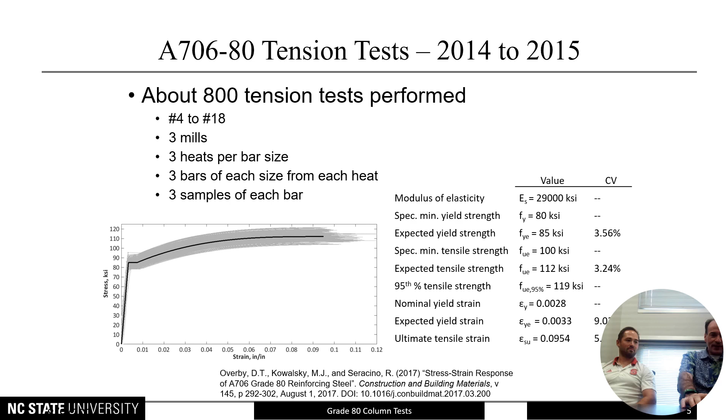And in the conduct of that test, he did approximately 800 tension tests to get the stress strain curve of A706 grade 80 steel. In the US, 706 is a designation for weldable seismic steel. And we came up with recommendations that led to changes in the Caltrans seismic design criteria.

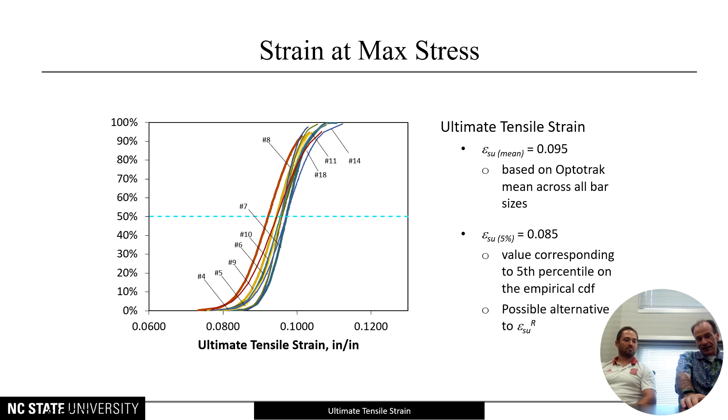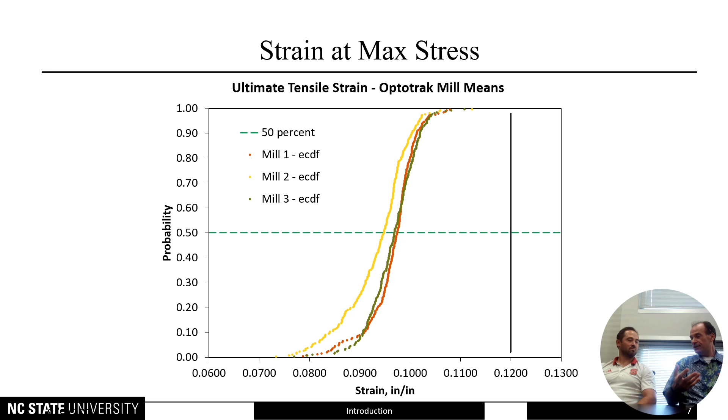So things related to strain at maximum stress, yield stress, ultimate stress, all the typical parameters you would need, and they were expressed statistically. There was variation with bar size for all these different parameters, including the ultimate tensile strain. That one was lower than what you'd expect for grade 60 steel, but we felt it was high enough, sufficient that there was promise to use this in seismic design of bridges.

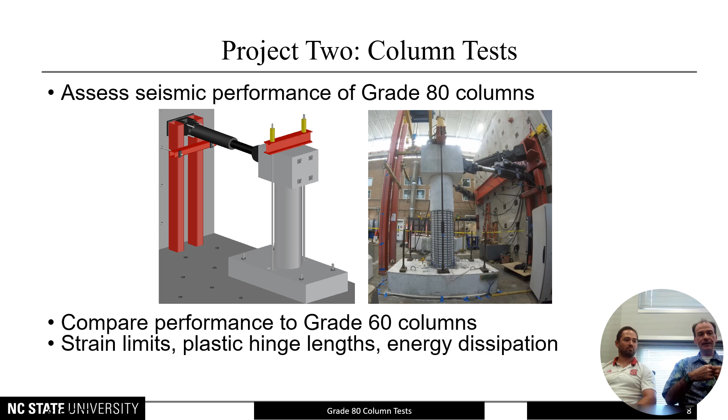That led to our second project a couple years later, where we wrote a research proposal to study the behavior of columns reinforced with high-strength steel. Thinking about the deliverables, we had to look at the performance of the columns, compare them to columns reinforced with grade 60 steel, look at plastic hinge lengths, energy dissipation, and strain limit states. Leo did that, and we wrote a different paper on that topic.

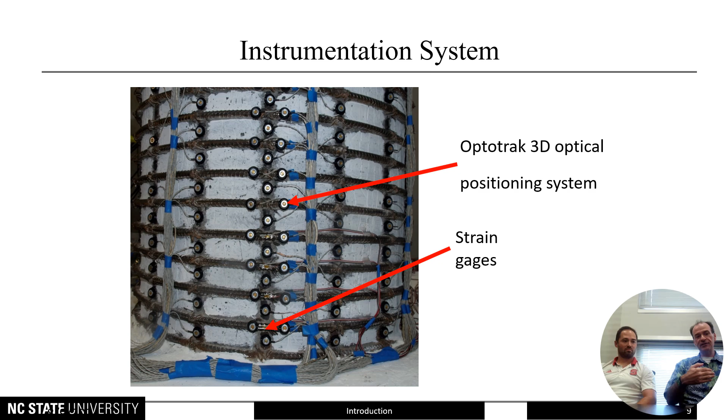We had instrumentation which we call Optotrak. It's a system that uses LEDs to measure position to a very high degree of accuracy up and down the reinforcing steel, and they were there for strain. To that point in time, that's all we were using these for, to measure strains and then curvatures, and we'd been doing that for many years prior.

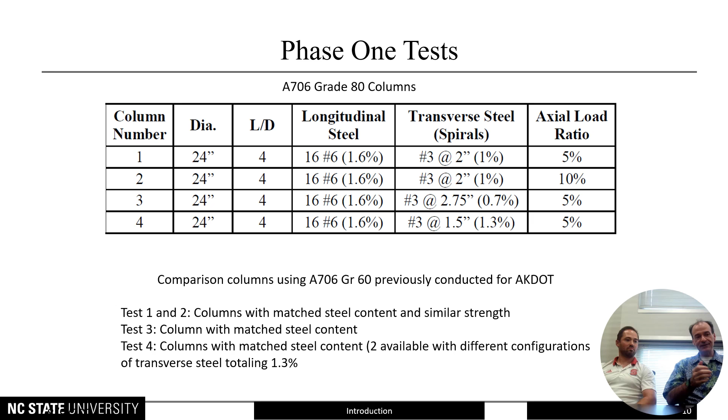We noticed that overall, as you'd maybe expect, there was a slight reduction in displacement capacity, nothing drastic, but it was important to quantify.

But the other thing we noticed, which I think was more important, was that in the columns reinforced with grade 80 steel, there wasn't a lot of delay between buckling and fracture. It was almost like the next cycle, whereas in grade 60 steel we'd always seen multiple cycles in between. We thought that was important and interesting - what's going on?

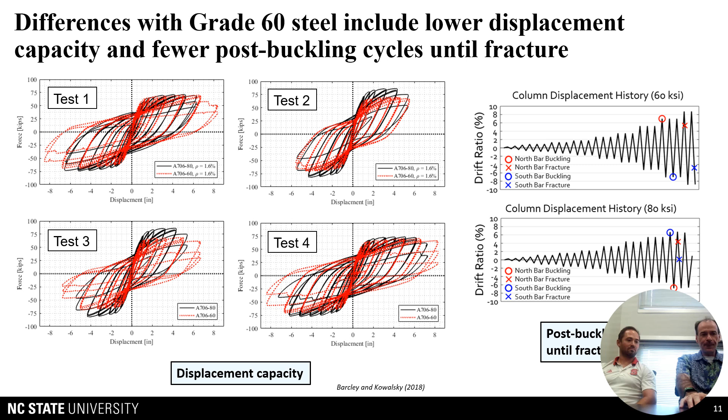Why is that different? And that's what led to this, right? So I don't know, Leo, if you want to chat a little bit about this - not to put him on the spot. Well, I'll say maybe for a future one you've got to call up Chad.

Chad did a bunch of those tests, so it was a direct comparison between grade 60 and grade 80. I think when we were thinking about it, Chad developed a bunch of different equations for determining where the cage or the spirals yield, and then what yields to bar buckling, in terms of trying to get different limit states.

Bar buckling was always something you design to, and then you have a little bit of factor of safety after that. But after seeing this, with bar buckling you don't really have a whole lot of factor of safety after bar buckling with the grade 80 column. So what's the difference? Why is there this difference?

So we said, well, when it buckles - this was a long time ago, I'd have to go back in the Wayback Machine - but basically taking the curvature and using that curvature along the cross-section to calculate the strain, particularly the strain that the buckled bar would undergo in compression. That's the compression strain on a buckled bar, which we were able to measure because of the Optotrak system.

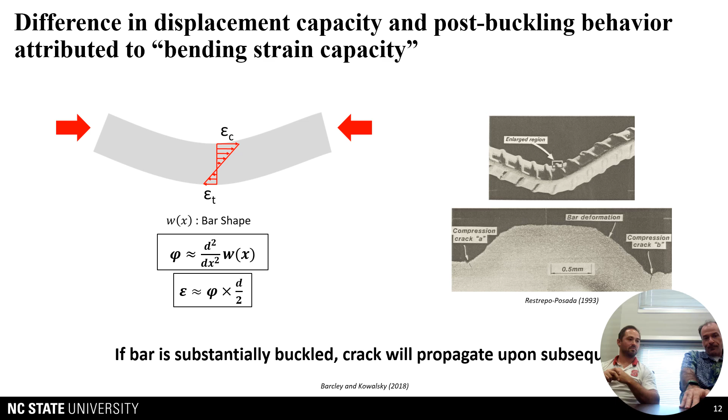Yeah, so that was really the buckling induced bending strain. That's one thing we hadn't really thought about - when you have bar buckling, of course the bar is bending, and that imposes strains along the cross section. That strain on the compressive side, which Jose Restrepo suggested many years ago might be important, is something we kind of keyed in on, saying okay, we need to look at what's the bending strain you generate in a buckled bar.

So this is what you were getting at, Leo, with the Optotrak, right? You go from the position of the bar - which is what we had used, as the position between the bars increases, that's how we'd measure strain linearly along the cross section. And then you can really tell when the strains went off the chart when the bar had buckled, because then it is way off the chart.

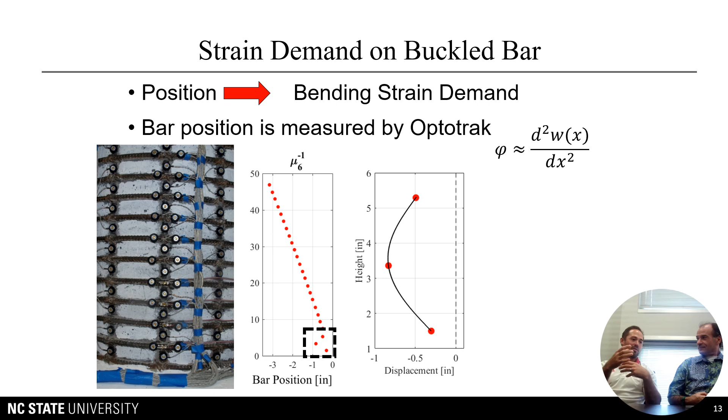And that's what we used to say, okay, now the bar is buckled. Now we basically just say the bar is buckled, let's ignore it at this point. But we said, well, actually we have more data that we could use, and this is more fitting aligned to the position data there.

So if you take the position data, do some calculus - which in this consulting world we haven't done in a while - do some math to actually work out what the curvature is, and then use that curvature to calculate strain, which we were able to do because we already had the columns and all the position data along the length of the buckled bar.

I think what's interesting too is you can see it, right? This is that position data you're talking about, and you can see at the bottom you can visibly notice the buckled shape, and that's what's blown up in here. And to take the second derivative of that displaced shape, and you get the curvature.

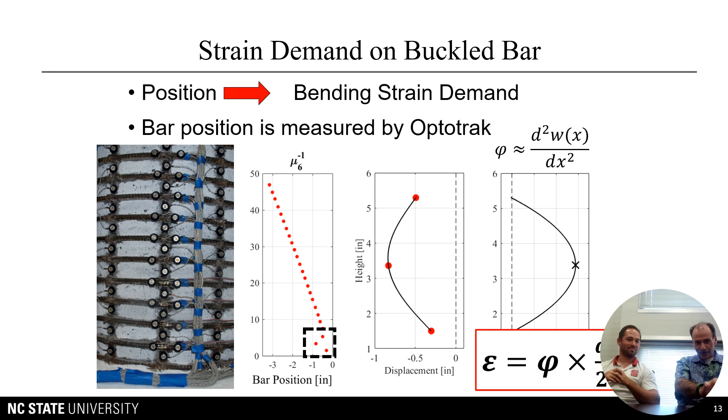And then of course, once you've got curvature - it's a bit obscured by our photo there - you take that and multiply it by the neutral axis depth, and you get the strain. So it was kind of an obvious thing to calculate in retrospect, but at the time it was kind of like piece by piece, as I remember.

Okay, we can get to this next step from that. Yeah, and you did though. So the ones on the left were - we were referring to Chad. Chad refers to Chad Goodnight, a former PhD student who's also known in the consulting world.

But he did many column tests to look at performance limit states for conventionally reinforced concrete bridge columns, and we had this wealth of data available that Chad had used for many different things. But now we have this ability to go back in time and say, okay, we have this data from approximately 10 years - not quite 10 at that time, maybe 7 or 8 years prior - and we could look at that information, look at that buckled shape, look at the displaced shape, calculate the curvature, and then calculate the corresponding bending strains.

And that's what we did with Chad's data, and it was really quite interesting, because if you look at any one of these bars that you see here, bar 0 to 25 or 30 - those are different bars and different tests, it doesn't really matter which one it comes from. But if you take any one of these, for example, let's pick a good one here, maybe like number 8.

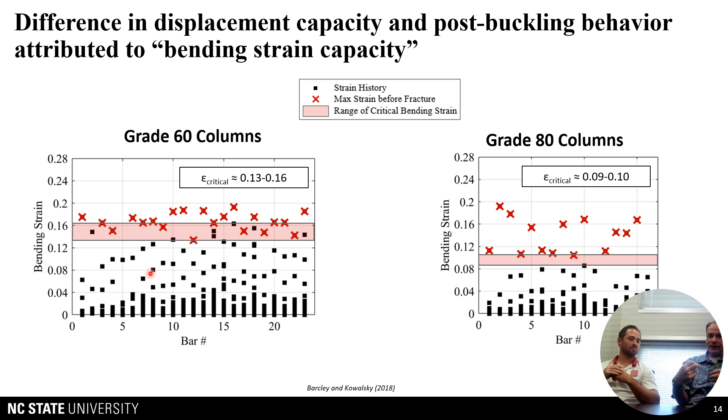So if you look at bar number 8, all these little squares show that after loading to that level of displacement in that column, and then going back in the other direction, that particular bar was being subjected to bending, but it didn't fracture. It only fractured once it got to one of these X's. So as you can see from that one in particular, you could bend the bar quite a bit until you got to a point where you couldn't.

And at that point, upon reversal, that bar had fractured in that column. So what we did was look at all this data and find the value of the lowest fracture, which was right around 13%. What's the value of the highest unfractured bar? That was about 16%. So we inferred that the critical bending strain you can sustain for grade 60 steel is somewhere between 13 and 16% before the bar fractures.

And then Leo, you did that for your tests. Yeah, so like we mentioned before, we saw that one of the bars buckled in the grade 60 tests, the conventionally reinforced one. It had a couple different displacement cycles, and we're trying to look at why this happens.

So we did the same thing with the grade 80 columns, and again there were only about 16 bars in each of these tests. So you only had a couple bars on the extreme fibers that are actually buckling, which is why you don't have a vast wealth of data. We just have the data from the bars that actually buckled.

But in the grade 80 columns, the bar begins to buckle, and that's really when it first kind of slightly buckles that you start to be able to measure bending strain. For the rest of the test, the bar is straight, so you assume there's no bending strain at all. But we saw in these grade 80 bars that when they kind of buckled once, came back, and then they were fracturing the cycle after at a much lower bending strain.

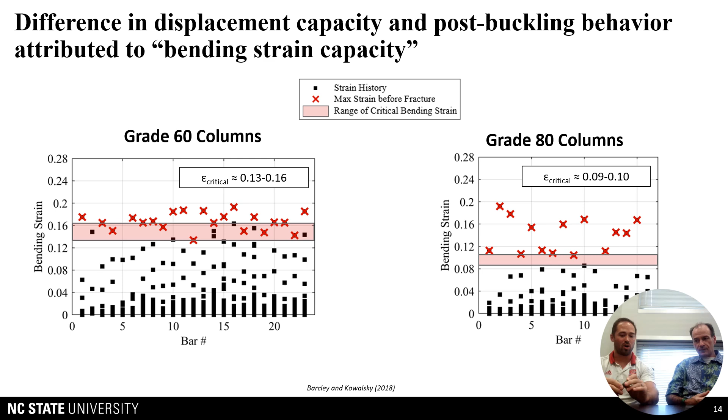So when we noticed there was a difference between the grade 60 and grade 80, we said, well, how can we recreate this without taking a year to build more column tests? We wanted to recreate this situation where we have a bar that goes from buckled and then gets subjected to tensile load. So we said, how do we recreate this system?

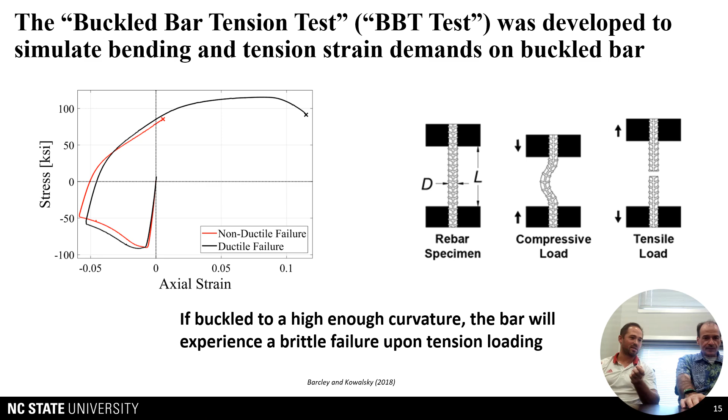And so we found that if the bar was subjected to a high enough degree of curvature, then the bar would fracture brittly along the next cycle. So, sorry, you go back. One, so like the...

Maybe not. Can we go back one? Doesn't seem like we can with this one. Oh, well, so one direction.

So the brittle fracture - this would theoretically be more elastic. It wouldn't be as brittle of a fracture. So coming down here, subjecting it to a compression force, compressive strain, comes up, and if the bar fractured here, without being able to actually go into yielding or the typical elongation where you'd see a bar extend, that would be more brittle. Here you'd be more plastic, more ductile.

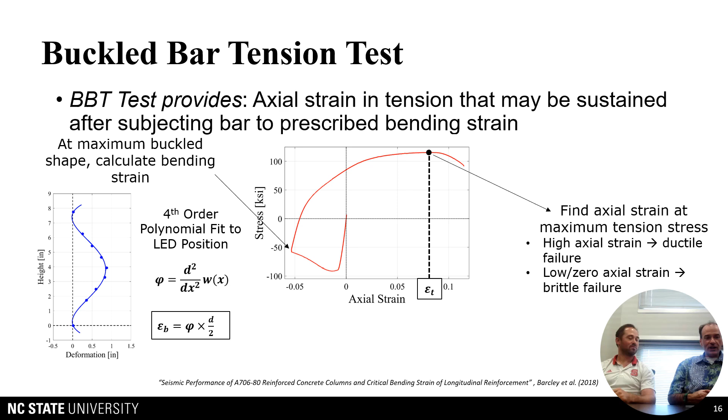So the amount of bending you subject the bar to, the more bending strain. If you bend it enough, you get a brittle fracture. If you bend it only a little bit, you're below that critical bending strain.

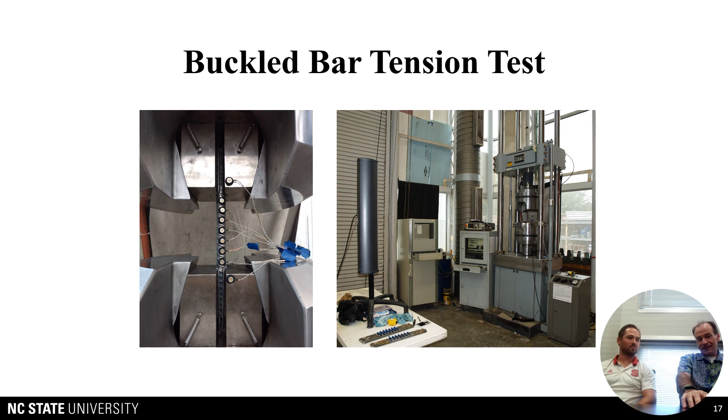It's ductile. Coming up, we've got some slides that show it, but this was your setup, right, where you had the bar between the machine heads, and in this case you have the opportunity to put many markers, right? There's like 7, 8, 9 markers on there, as opposed to only 3 on the column. With the column, you're lucky to have a few markers to measure the curvature. Here you've got enough that you can get the entire displaced shape pretty accurately.

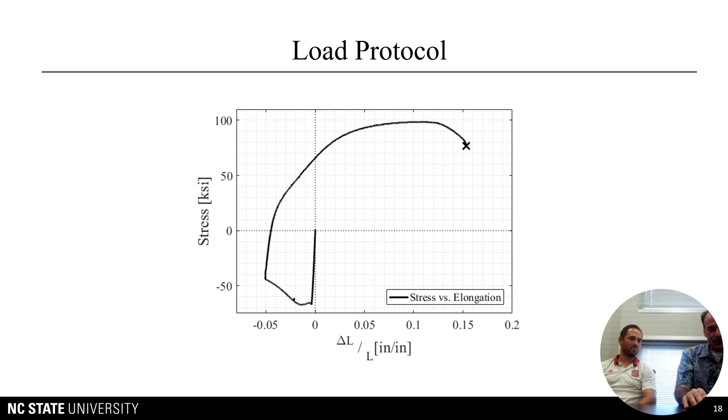I think this graph would probably show what you were suggesting there, Leo, right? Because this one's showing bending to a particular level of bending strain that allows you to get significant elongation. As you can see, it kind of progresses through, and eventually bar fracture. I think this is exactly the graph you were talking about earlier.

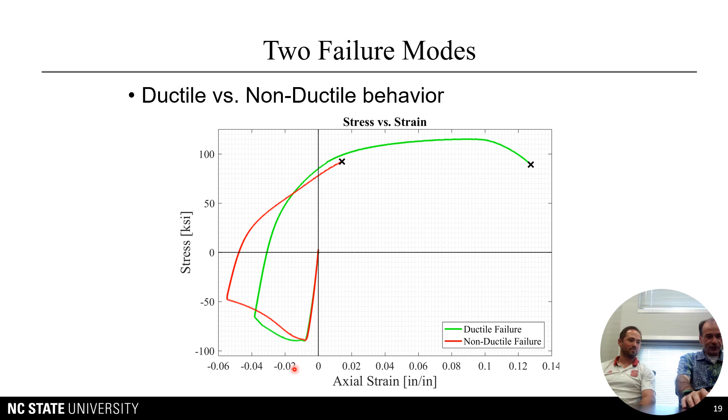So going - the green obviously is not subjected to as much. It does buckle because the force doesn't continue to increase as the bar buckled. So the green bar has buckled to some level, but not to an extreme level where, when the loading was reversed, the green bar was able to fail in a ductile manner. Like you saw on the previous slide, there you experienced necking. You had a much higher ductile failure, versus when subjected to just slightly higher curvature, the red, we saw a brittle fracture. So that distinction tells us that critical bending strain is somewhere between those two values.

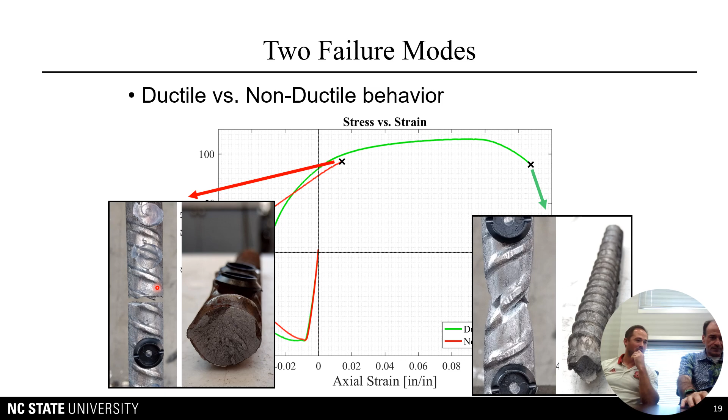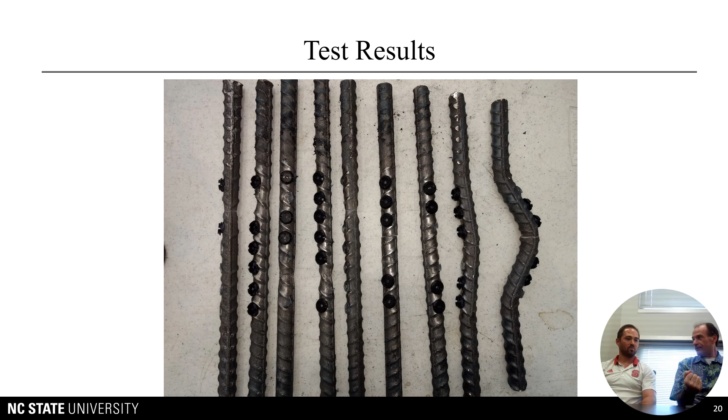Yeah, and I think we kind of divided those into the more ductile failures and then the more brittle ones.

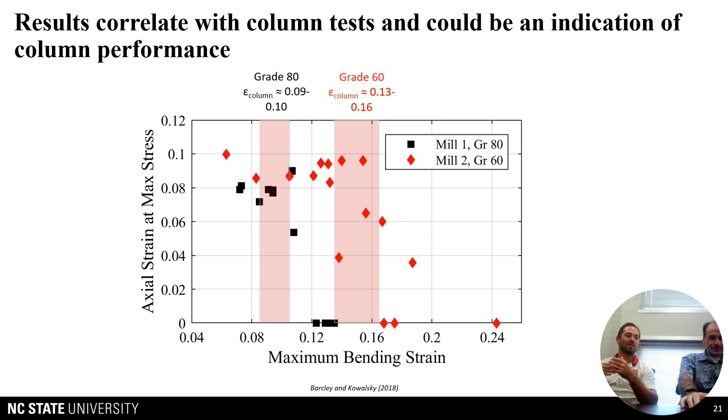The buckled bar tension test on the MTS machine was able to replicate the behavior of the columns, which led us to think this is the actual behavior of the buckled bar. It's not getting to its actual critical strain for elongation and then fracturing ductily. It's really getting to this buckling, and that buckling is taking it to this other limit state, which isn't just the limit state you get with a pure tension. Exactly, a buckle limit state.

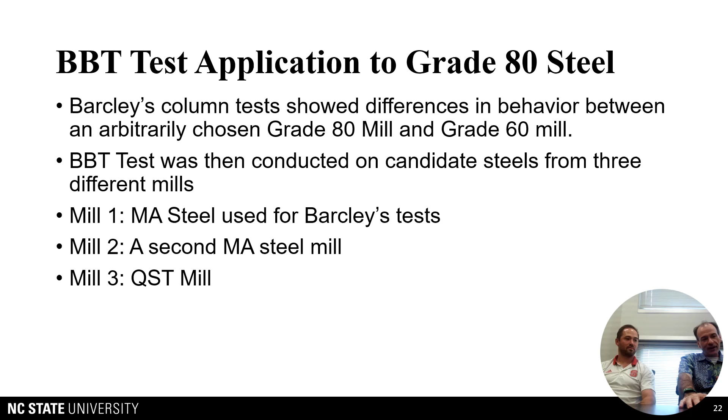Once we had some confidence in it, we applied that test to the microalloy steel that you'd used in your test, Leo, and then we also applied it to a second batch of microalloy steel as well as some quench and self-tempered steel. At this point in the research we were all interested in differences between quench and self-tempered steel and microalloyed steel, and whether there are differences in behavior.

To complicate things, we were looking at this, and you looked at the ribs for these two mills. These were both microalloy, but the second mill had these deformations which were much smoother, right? You can see it there, the radius was much softer.

The hypothesis was, will these behave the same? Because if you look at this, the second mill seems like it might have a bit less strain concentration, whereas mill 1 has a sharper radius, maybe higher strain concentration. Might that lead to a lower bending strain? And then you saw that in these tests, so you could see it in mill 1. Mill 1, I think, was the one that we did the column test with.

We thought, well, what influences this bending strain? Is it the actual metallurgy of it? Is it quench and self-temper? Is it microalloyed? Or is this the geometry of the actual ribs? Or some combination of the two, which is probably the case.

What we saw, the blue is the one with the much higher radius at the base of the rib, because if you go back to that Restrepo image with the micro crack at the base of the rib, you'd think if that's subjected to compression, a more refined stress concentration would lead to more of those cracks, and that's what we saw when we ran these through the buckled bar tension test.

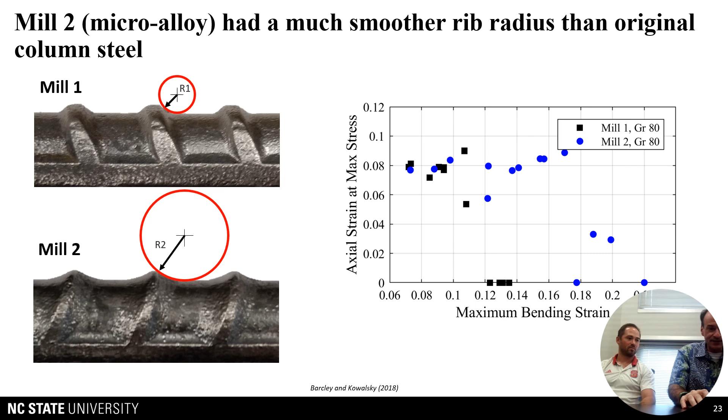And then the quench and self-tempered steel, the process was different in terms of how it's produced, not by microalloying or adding different small alloying elements, but rather by a manufacturing process that leads to a different behavior in the BBT test, right?

You could see this, the black was the microalloy and the blue was quench and self-temper, so it was much more gradual, a bit of a drop off. Exactly, it wasn't such an abrupt change.

That led us to, we're always mindful that there's many different ways to produce steel and there's not a right or wrong way, but you get different behaviors, and this could be interesting behavior that could be beneficial.

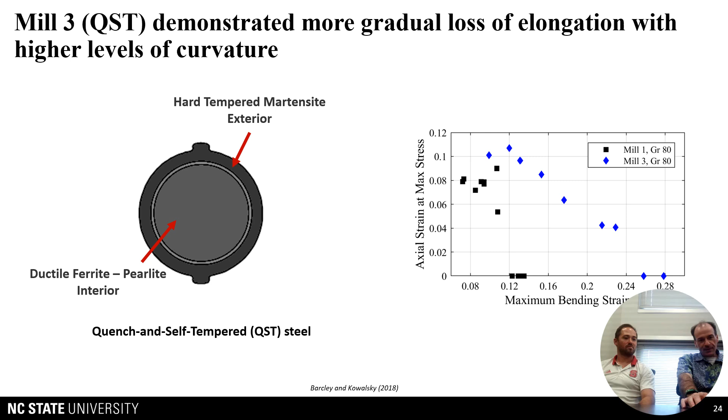Then you did these, these are interesting. We saw there's the lower stress concentrations, those bars did better in the buckled bar tension test, and so the critical bending strain was higher.

So we thought, well, what if there's no stress concentrations at all? So we sent this actual rebar, I think it was at NC State, the machine shop. We just had to mill the ribs right off the bar and see what is the critical bending strain with these bars with no ribs at all.

Confirmation, and just running through different options, saying, well, what's going to influence this? We see this, we come from these columns, we go to this test on just a bar, and there's almost unlimited possibilities. You continue to study and continue to look at them.

Leo, when we were chatting yesterday, you reminded me that we then went to California at one point during the research to Caltrans to present the work, and I think it was right around here, and I think we showed them this, and they got excited about maybe going back to smooth bars. We said, well, this is true, but of course you need that deformation for bond.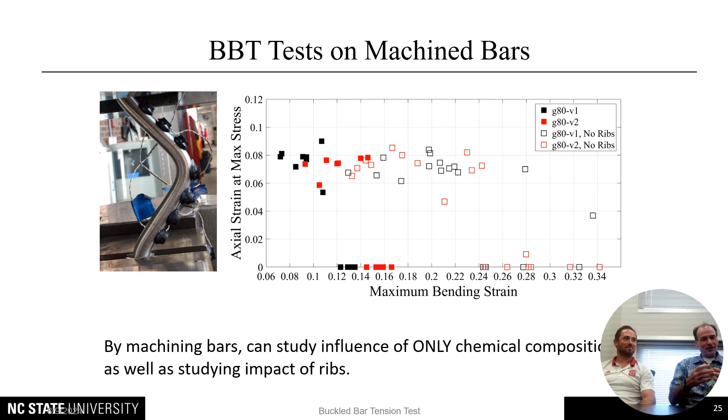There's ways around it. We actually did pursue that. That's a topic for another day, but we did do some tests with machined bars in the plastic hinge. There's good and bad sides to it, but for sure you get this increased bending strain capacity.

So we didn't want to go too far on this because this test has been used a lot. We use it a lot at NC State, and other people are now using it as well. We've got students here who are using it to do tests on low temperature effects. Lena is one of our PhD students, and she's built a little environmental chamber and is doing BBT tests at minus 40 to see how the temperature affects that.

That's pretty neat. And we have another student studying corrosion, this is David Komanichu, and he's looking at how the pits from corrosion create strain concentrations. So he's looking to see if you can correlate bars that have corrosion using the BBT test. So it's kind of gotten a life of its own.

It's a really quite useful test to evaluate at the material level. So that was kind of our story. To me it was really a neat thing to go through, and very rewarding in the sense that we discovered something that you can see has future applications to it.

We've prepared a document for Caltrans that simplifies the test, because the way we do it needs an optical system, but there are ways around it if you don't have that, to get an approximation where other labs could be able to do that. So I think it's been a good experience.